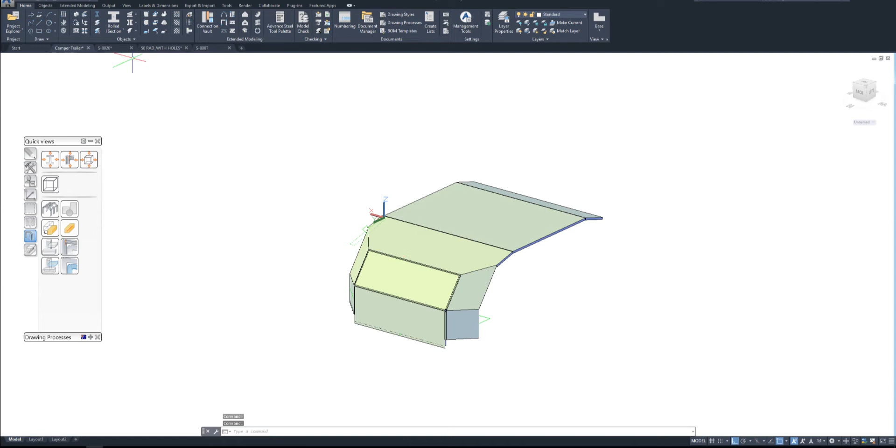So basically what was happening when I produced the drawing of this plate, this is what I was getting. The folding lines were not displaying correctly. When I produced my NC files, there was no continuity between the folding line and the profile of my plate.

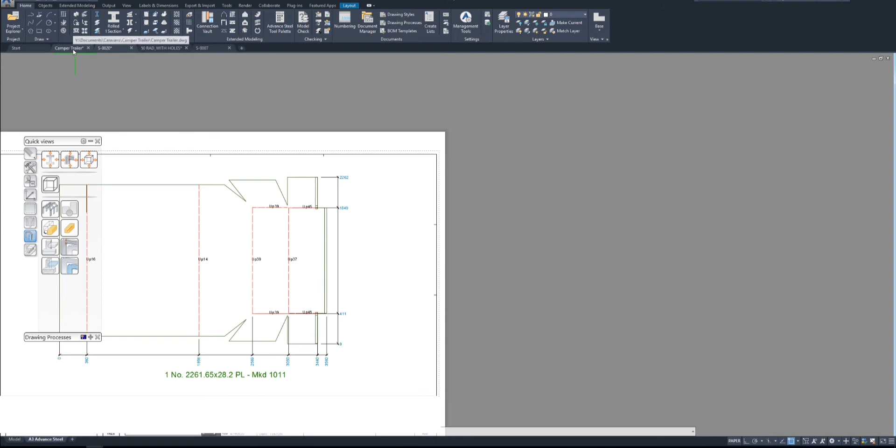So basically what was happening, if I go here and just display the unfolded plate, we look from the top, you can see there are some clashes, some overlaps here on this area, and also here, and of course here.

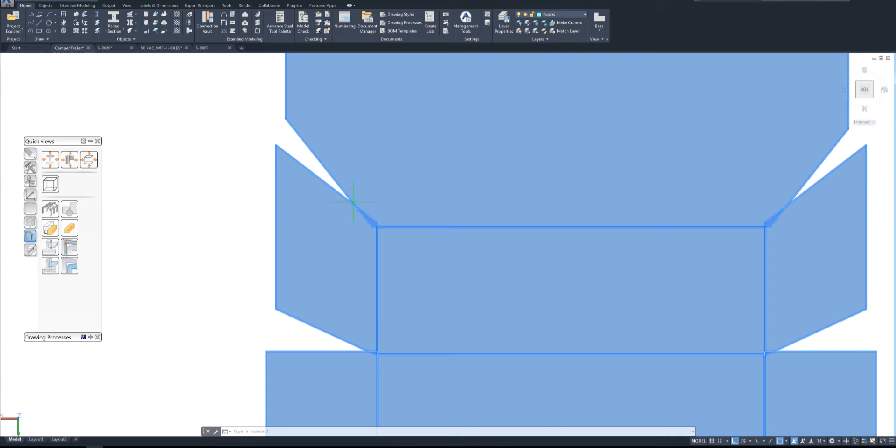So that's why when I produce my single part drawing and my NC files, I was getting those gaps there. So one thing that I wasn't doing that is very important is you need to really check, because when modeling, everything is possible. However, when fabricating, you need to check that this plate is possible to make.

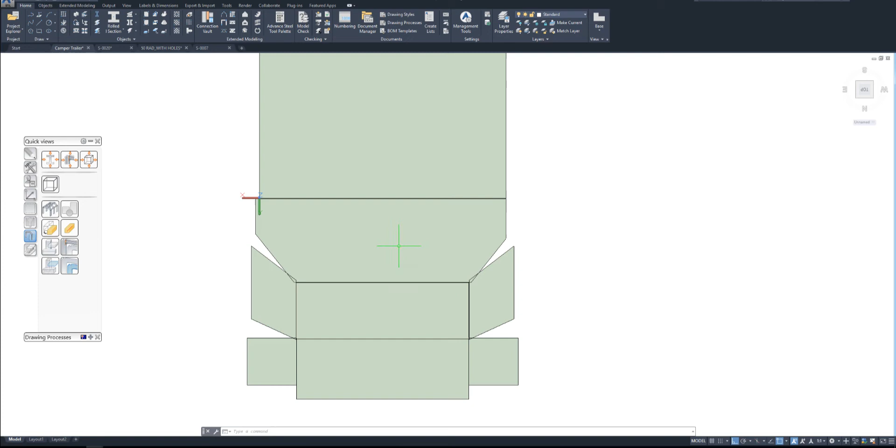So for this, what you have to do is just select the plate and then go here, check unfolding. If you click there and then on the plate, it says selected folded plate cannot be correctly unfolded. Then it asks me if I want to see the unfolded representation.

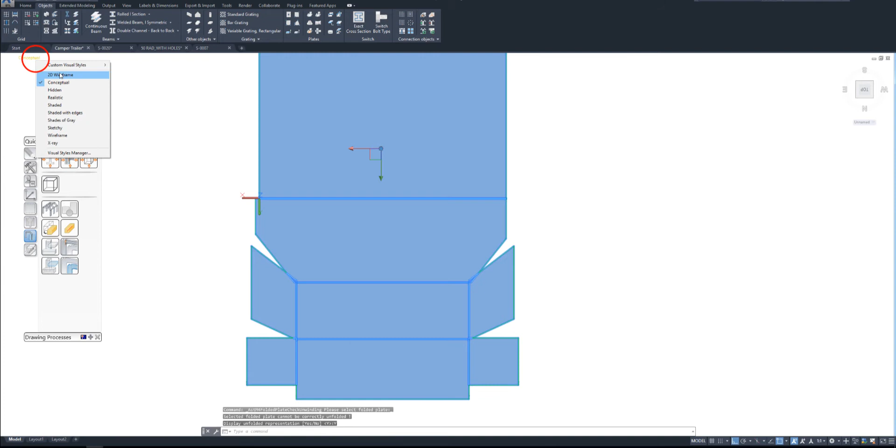So if I say yes, just going to wireframe, it shows me that I got some problems, like clashes, overlapping here. I'm not sure why it's not showing here, but before it was showing on these areas as well. So I had to do a bit more work on this plate for it to work.

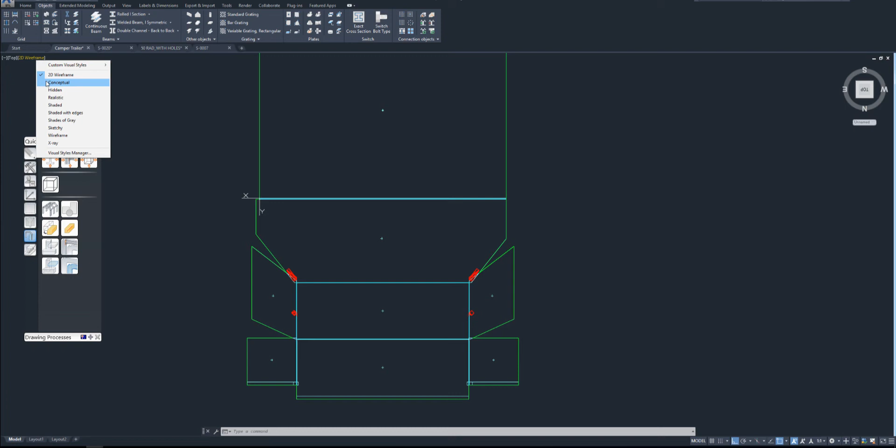So I'm going to show you what I did. If we go back to conceptual, right, we definitely have to put some relief here, like either a hole or something, so we don't have that overlap.

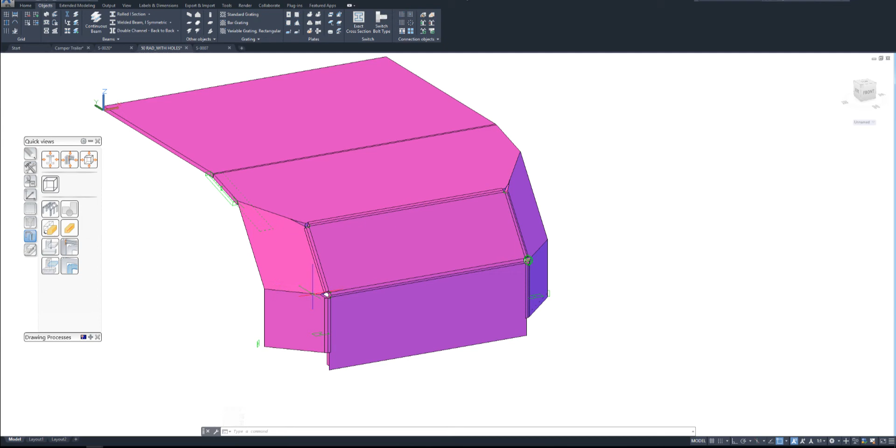So in this second model, if you see, I created some holes that I will then cover, like in the actual model we will cover with some steel frames, that will also serve as reinforcement. And then I just use the planes.

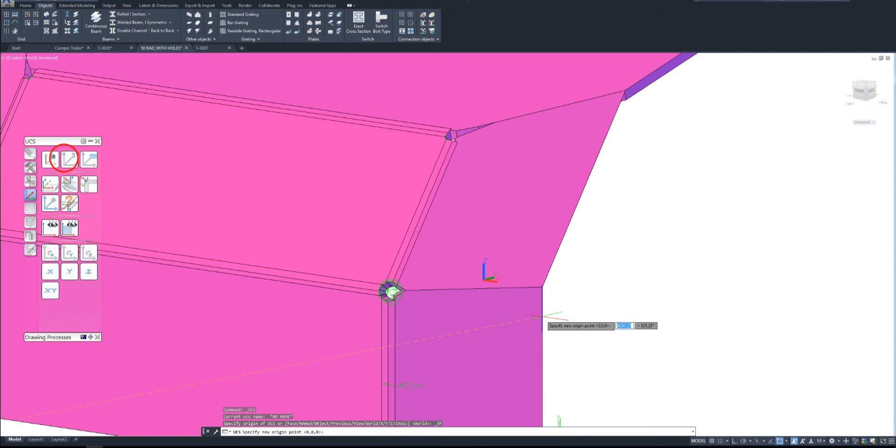So we have many angles here, as you can see. We have some twisted plates here. So basically I located my UCS with 3 points to square up with each of these panels here.

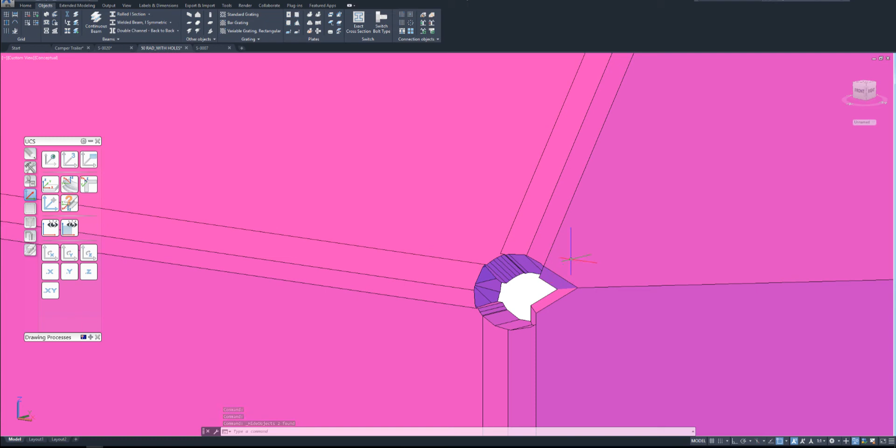And then created, you see, in these 2 panels just a circular relief, and in these other 2 panels, if we hide this and this - hide objects, well it's not displaying - but I just put a chamfer on these 2 panels, so that way I create that space for the cut, for the cutting machine to go through, in between the panels.

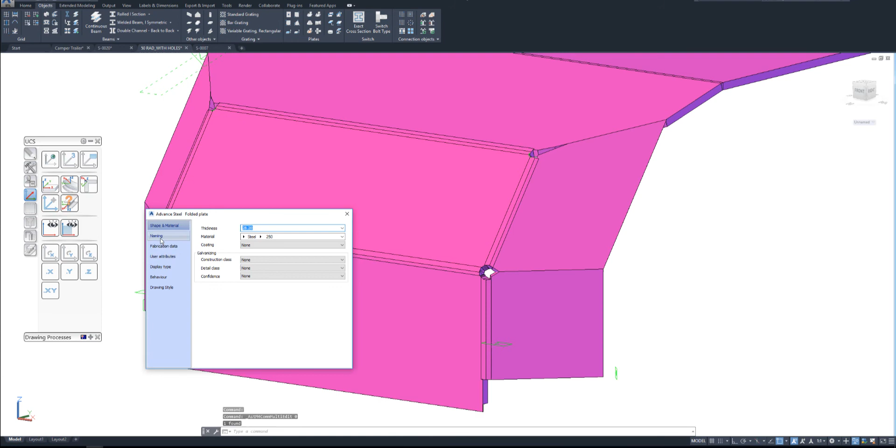So if I unfold this, you see, if I just go to top view, you see how we don't have that clash anymore, so the machine can access this area no problem.

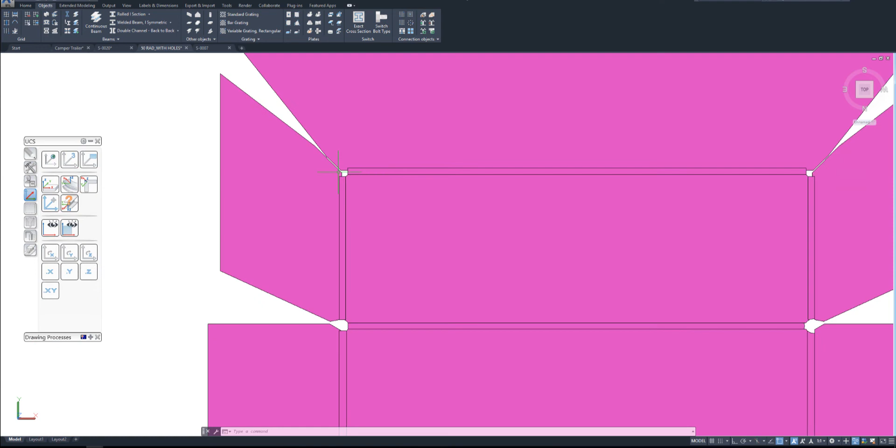This one is a little bit too tight still. We can even open this a little bit. The problem here is compromising the design.

But well, you can either, in this scenario, just create with these two panels one panel, and then a folded plate of just these two parts. But the client was requesting to have everything in one plate. So that's what we could achieve.

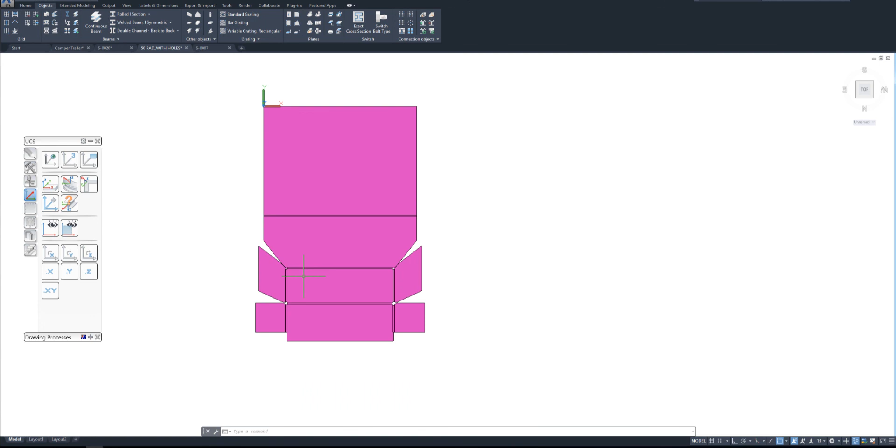We definitely have to have this relief here, and that's how I did those profiles.

So now if I select this here and I go to check unfolding, it says selected folded plate can be correctly unfolded. If I want to display the unfolded - see how the green line shows the actual profile, and the green line shows the profile, and then the pink line is my folding line.

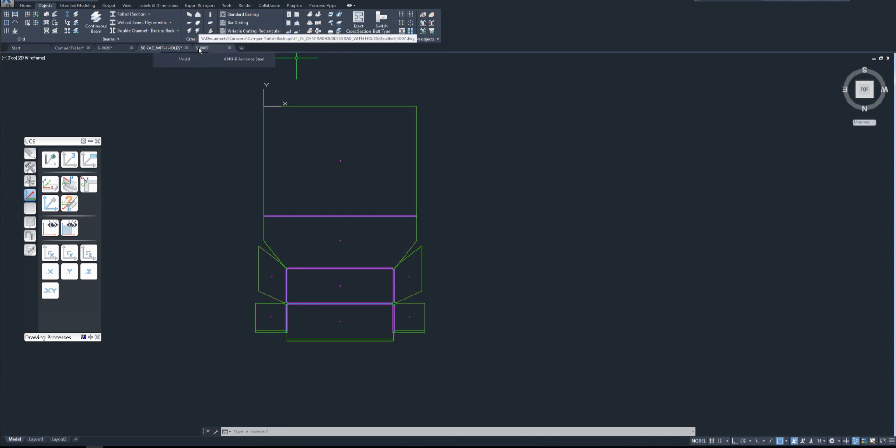So if I look at the drawing now, very different to what we were having here, where it was really not a good representation of what we need. So now we clearly see the path of the machine and all the folding lines.